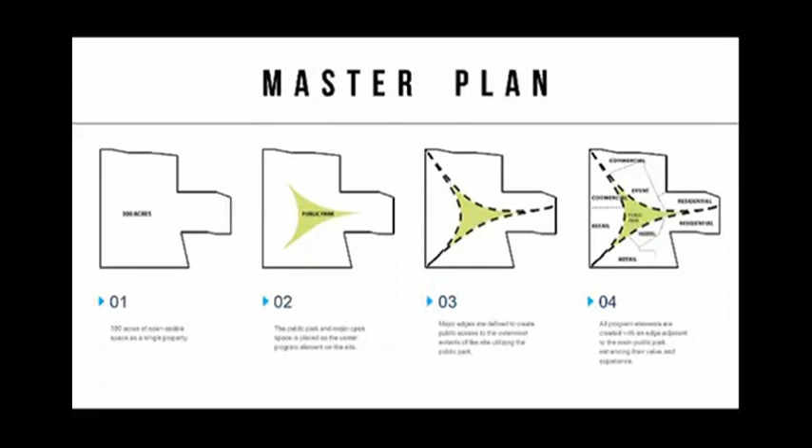So what is this park? When we came together with Gerard and Mayor and started to think about what this place wanted to be, 300 acres of land, we knew we didn't want to put a stadium in the middle of this property surrounded by a sea of parking. That just wasn't going to fly. The words community, a great place to be, kept going around. So we decided to put a big public park in the middle of this development, in the middle of the surroundings, and then connect that park with three big arcs that connect the corners to make this a very porous environment, something that's connected to the citizens, everyone can enjoy. And then we surround it with the development itself: the stadium up in the northeast corner of the site, retail at the bottom of the page, mixed-use residential and commercial. What that makes is a really unique and transformative environment, some place that you're going to see.

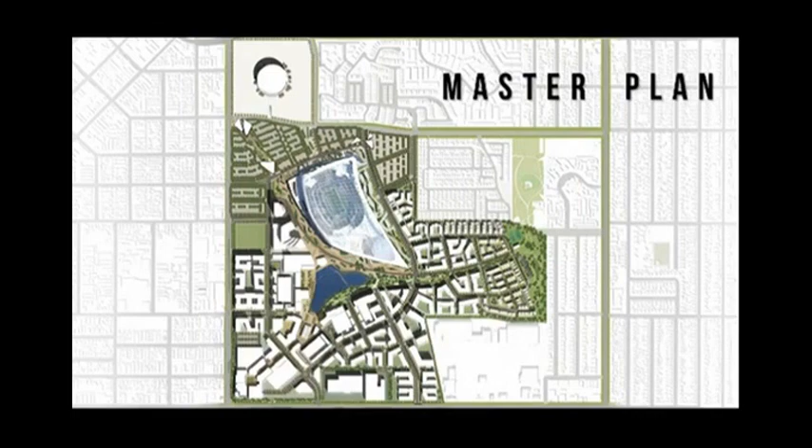Imagine this from the air or experience it from the ground: the lush landscape, the lake park in the center, being in the retail environment on the edges, and if we're fortunate enough, watching the Super Bowl here in a couple years. So one of the things you saw around the stadium was this unique network of greenscape.

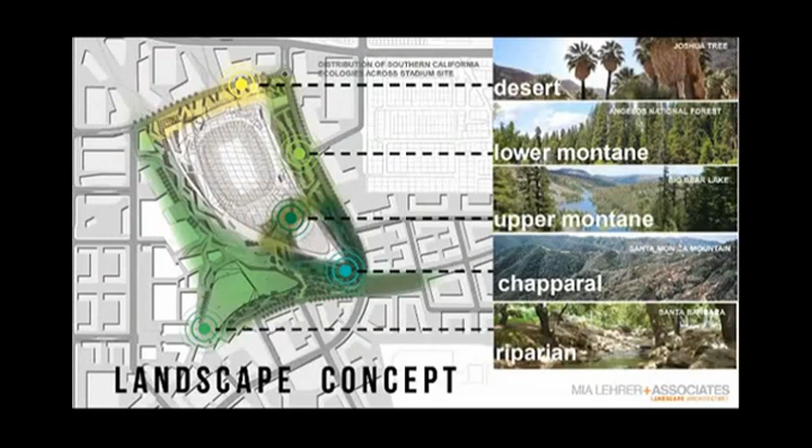Working in association with Mia Lehrer + Associates, one of the preeminent landscape architects in Los Angeles, we developed a story and a strategy for the landscape. We decided not to take unique plants from all over the world, but we wanted to do something local to Southern California. So our stadium is actually going to be kind of an educational journey across Southern California. You can see the regions up on the screen on the right. When you come here, you're actually going to get a story about what the place is, the landscape that makes up Southern California, what makes us love this journey.

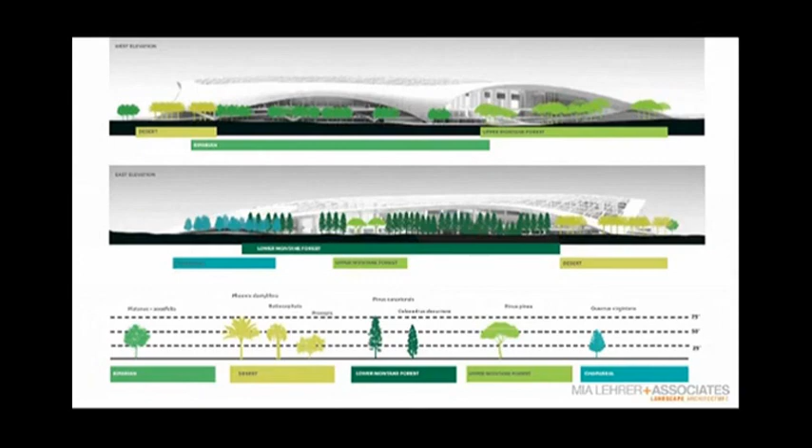But what it also allows us to do is actually play with the scale. Look at the top right image, that's the west elevation, where we're trying to make a statement about the building and what it wants to be. The bottom image you see is elevation on the east, where we're fronting a residential neighborhood. We're trying to be good neighbors and decrease the scale of the building. So our landscape allows us to do that. We're able to shed the building as much as we can with a network of lush vegetation.

One thing I have to mention with all that landscape is it's not only educational, but it's water-wise. All these plants are native to the region, and we're going to be really responsible with the way that we treat that. So this is kind of the nuts and bolts of why we're building what we're building.

And it's all the myriad of events. You see the Super Bowl, you see the potential for a Final Four, but you also see the opportunity for a farmer's market or a kids' flag football game. That's something that's very important to us: this notion of scale, that this thing has to be extremely scalable, the stadium.

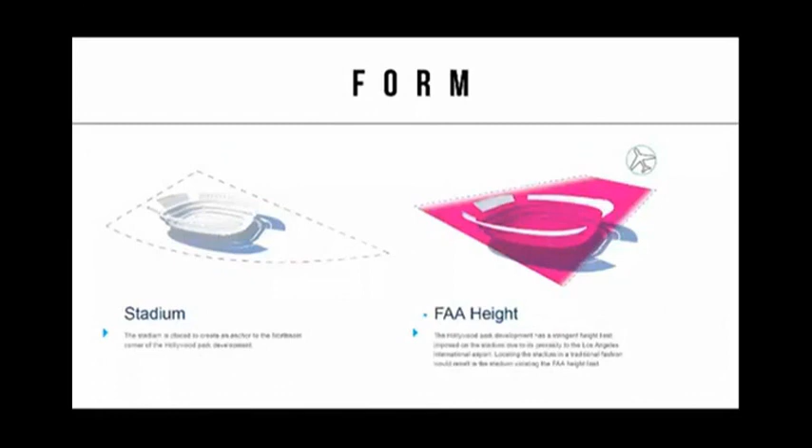I'm going to go through this really fast just to tell you about how the stadium itself was derived. We can't limit the fact that we are actually next to LAX, so we have to acknowledge that. We've actually embedded the stadium in the ground, just like our ancestors with the Dodger Stadium and the Getty, as we mentioned. But what it did here is it allowed us to really be a great neighbor. Where a stadium would be 300 feet in the air, we're able to really reduce that scale, becoming something more appropriate to the neighborhood itself.

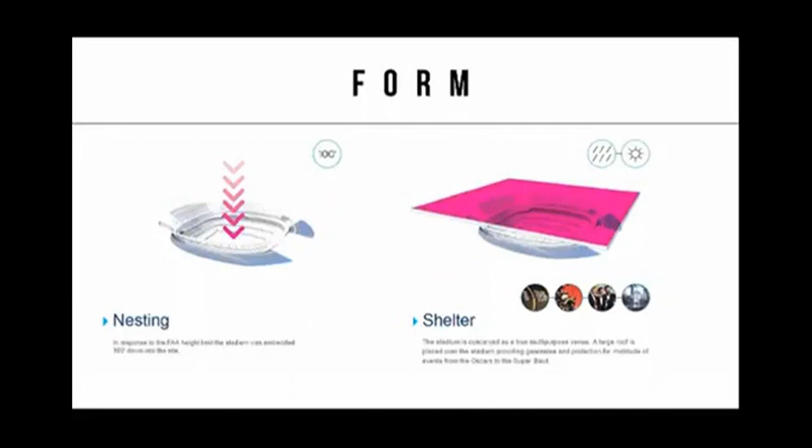We wanted to ensure we could have all these events that I just described in the slides before, that we were actually able to do so. So we put a great canopy over it. We're calling it a canopy, and it's not an enclosed stadium. So what we had to do was really sculpt and define what that canopy wanted to be.

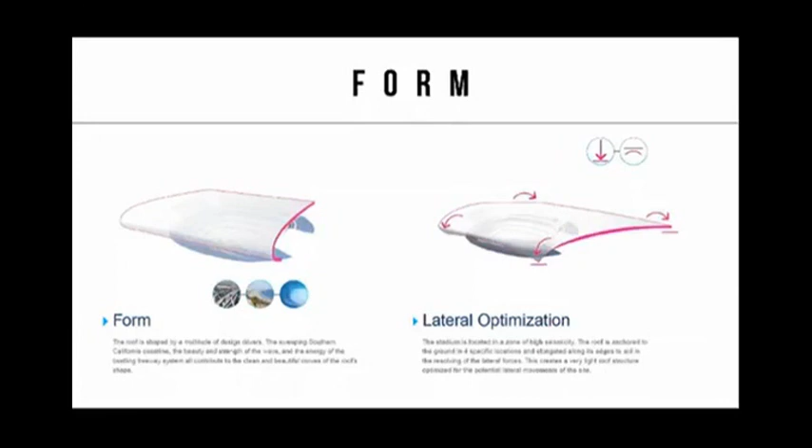It was informed by all those drivers that I mentioned in the past: the coastline of Southern California, the sweeping curves, the energy of a wave, the energy of the freeway system. All these things kind of came together for us and really embodied what the stadium was. We then tweaked the design and the roof itself to allow for structural or lateral optimization for this region, and it was very important to us to strategically tie this stadium into where it is.

We supplemented that with a series of vertical columns. They allow us two things. This is a very different form of the building. So what we wanted to do is put a little nostalgia in.

So we have a series of vertical columns that wrap around 3 sides of the venue, kind of echoing the past. I think you guys walked through a venue very similar to what I'm speaking of today.

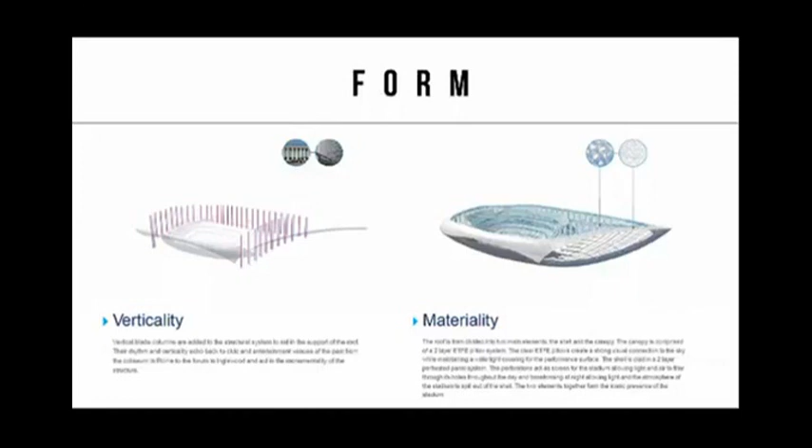And then materiality. We divided the canopy into 2 big main moves. One was an ETFE roof, a clear, transparent roof, which allowed ultimate connectivity to the sky and the environment. The second was a perforated metal skin, which allows light and air to filter in throughout the stadium, giving you an ever-changing pattern of shadows throughout the day.

I haven't mentioned any walls, because this is going to be completely indoor-outdoor, and that's our goal. This is truly just a canopy. All the concourses will be open to the environment, connected to the landscape, connected to Southern California. It's going to be a truly unique, one-of-a-kind venue.

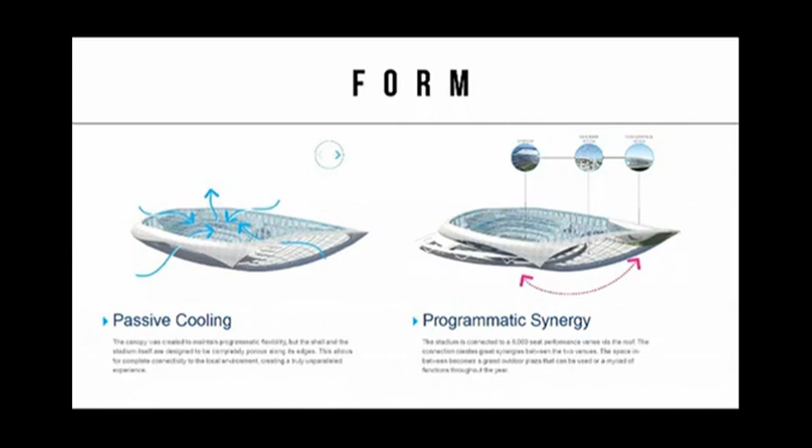And as I mentioned, the programmatic synergy, there's really 3 venues here: the performance venue, the outdoor room, and the stadium itself. All could be working in tandem, or all could be working independently. I think it gives us amazing flexibility for what this place could be.

So a little bit about ETFE. If you don't know it, this was actually a material used on the Water Cube in the Beijing Olympics. What it is, it actually has all the qualities of glass - it allows all the light to come through like glass does, but it's 1% of the weight. That allowed us to create one of the lightest roof structures around for such a large scale.

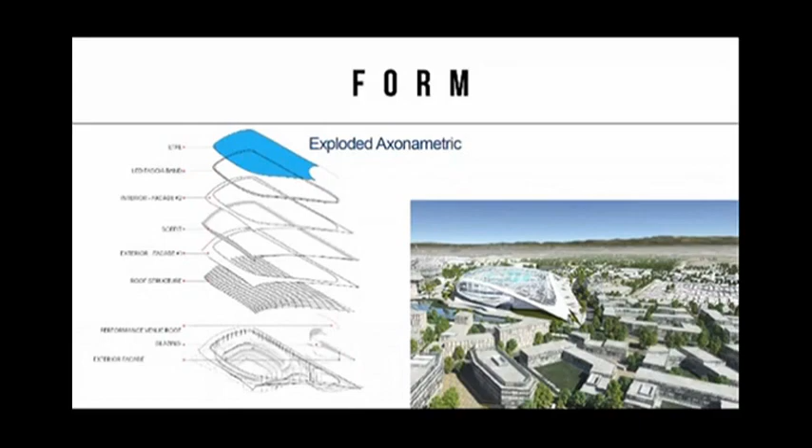You can see on the diagram here kind of what we do as architects to describe how the building's put together. The ETFE is on the top layer, followed by a series of layers that build what we call the enclosure of the machine, with the perforated metal. What that does is really define the stadium itself.

You see one of these anchor points where the roof touches down, and on the southern end it kind of takes off in 2 different directions. Each one of these 4 arcs around the stadium really define the entries into the building. These are the main identifiers for it, but it also allows connectivity into other spaces and places of the site, like the lake park you see on the left-hand side of the image.

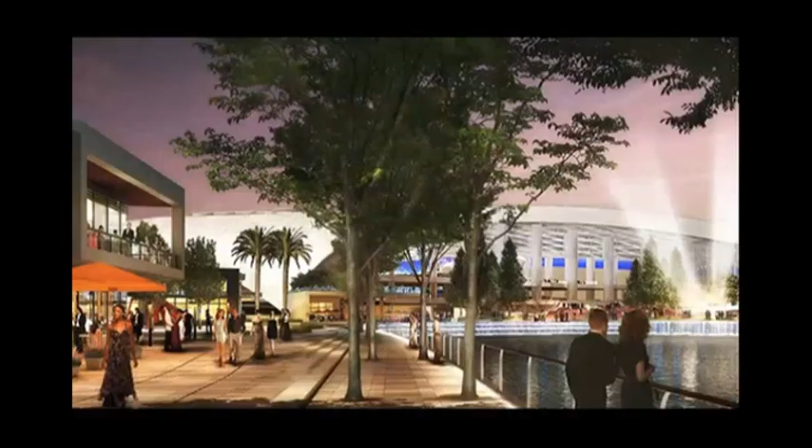And I talked about this notion of scalability. We designed it for 70,000, 80,000 seats, but potentially 100,000 people. But it also has to be a nice place to be for other events - this might be a red carpet event or a premiere happening at the performance venue, something that's scaled appropriately.

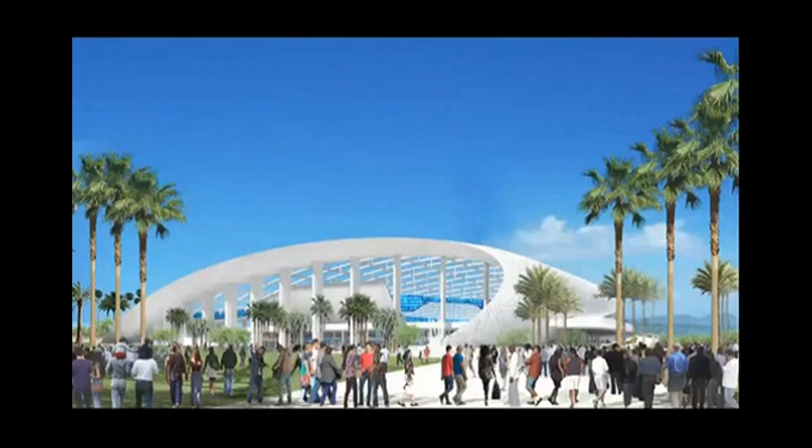This is my favorite shot of the whole venue. This is showing our view looking back to Hollywood Park. If we were in the forum looking back, you see the long, smooth, graceful arcs connecting the 2 anchor points here on the northern elevation. Those arcs are cascading down - if you look to the left-hand side of the page - followed by a series of those vertical columns.

As they go down, what they define is really a different character on the opposite side. This is the eastern side of the stadium, which faces the residents to the east. The stadium actually lowers its stance, and that was very important to us, a real benefit of us going into the ground 100 feet.

If we put Cowboys Stadium right next to this and did a comparison, it would be about 100 feet taller than the image on the screen, or about twice as big as what you're seeing there. So it was a really great opportunity to allow it to happen.

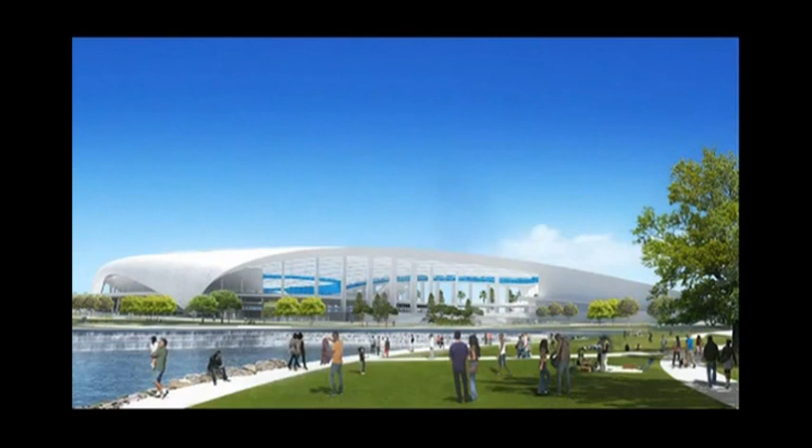This is a wonderful shot looking over the lake park. You could imagine yourself sitting there on a lazy Saturday afternoon having a picnic, with this stadium in your foreground, as your background, and just the wonderful opportunities that it entails.

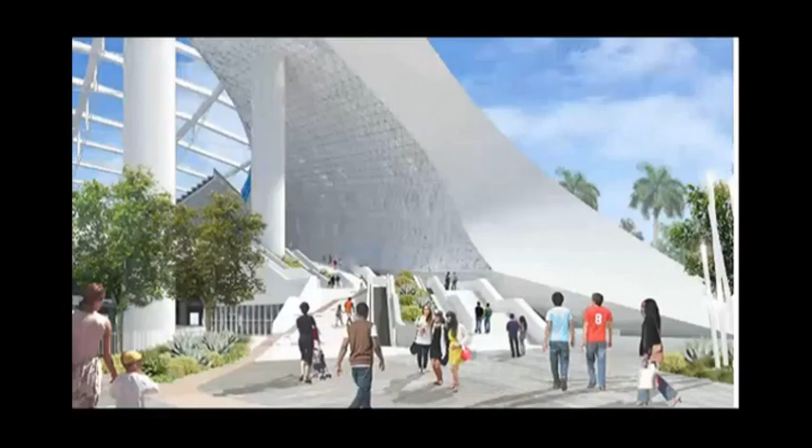So how do you get in there? I was showing you 2 of the main entries - this one's on the north. What we've done is embed the access points all along each one of those touchdowns. We have a series of stairs, escalators, and elevators that will take you up and around the stadium, allowing you to get up close and personal to the skin.

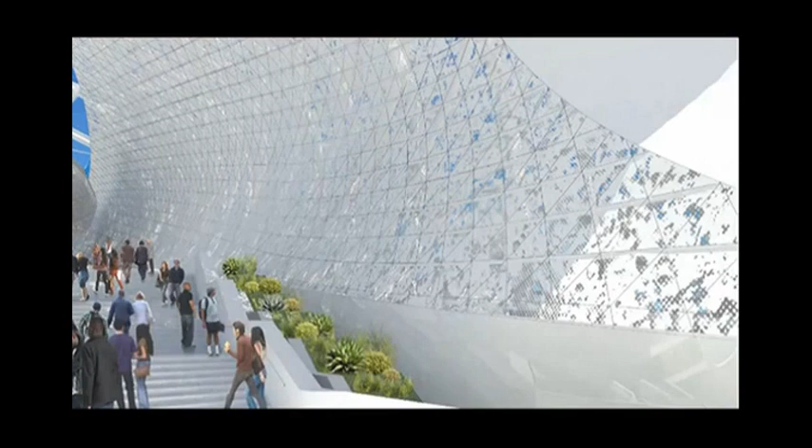Allow the light to be dancing off your face, allow you to feel the air pass through the movement, really allowing that connectivity. You see the landscape is going to be continued and sprinkled throughout the concourses. I think this stadium is no longer going to feel like walking into a concrete jungle - this is going to be pretty transformative. The idea of the park continuing into the stadium itself is really key.

This is the outdoor room.

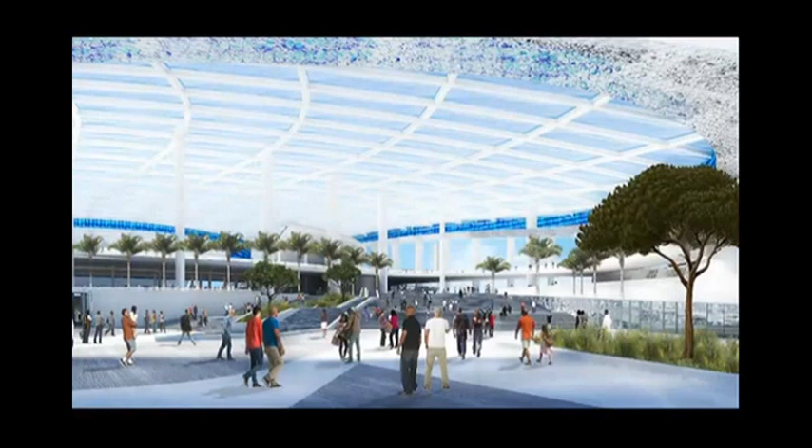So this was looking through into Lake Park into the space, and this is how the majority of people went into the stadium, underneath this massive canopy, 2.5 acres in size, something that's really scalable and lovely as it relates to the functions and activities that could happen in the space. Your water features cascading down the steps, landscape happening on multiple levels, and you could see all sorts of community events happening in this space.

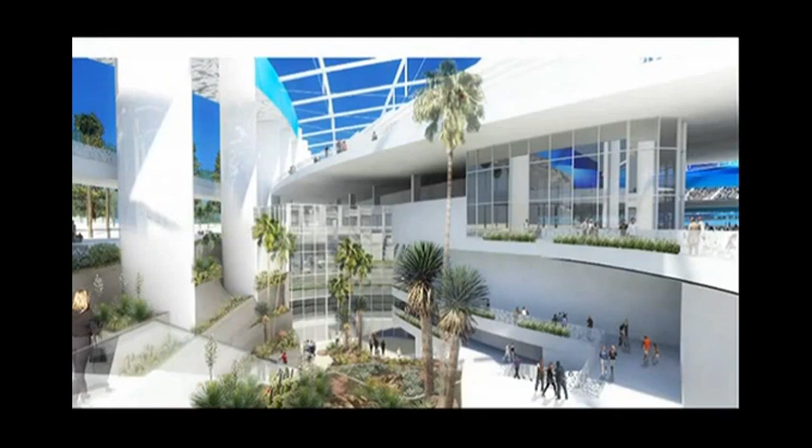The circulation for other avenues, we call these canyons, but since we're going into the ground, that 100 feet, we wanted to really add the landscape and allow that language to transform and continue into the building. So you have a series of these around the stadium itself, each one different, each sized and spaced appropriately and connected to the landscape language we were describing earlier.

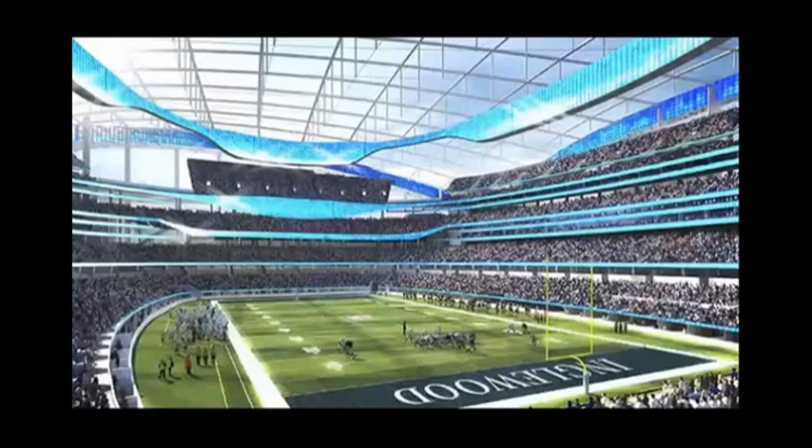And so that takes us to the interior. Completely immersed in the latest technology, completely connected to the outdoors with the ETFE roof, completely able to see through and connect to the local community with its open ends. You really create a lasting impression about what this is. And for us, this really is — it's not a stadium anymore.

We call this the next evolution of sport. So thank you guys.

So the question always comes up, are we in a race?

Wilson Meany builds quality communities throughout California, and most of those transformed communities. We built the Ferry Building in Northern California, and if any of you know about that building, people said they would never go across the railroad tracks. Now it's the third largest destination place in San Francisco. It's actually now on the covers of magazines that announce your arrival into San Francisco.

We will take the time necessary to build a quality community for this community of the city of Inglewood. Our target date is to start this in December, and we plan to have this open September 2018.

But besides the sports and entertainment district, there's actually a lot more to this than parking lots. We are building close to 800,000 square feet of Class A office space to go along with this. That was not possible before in our first iteration of the project.